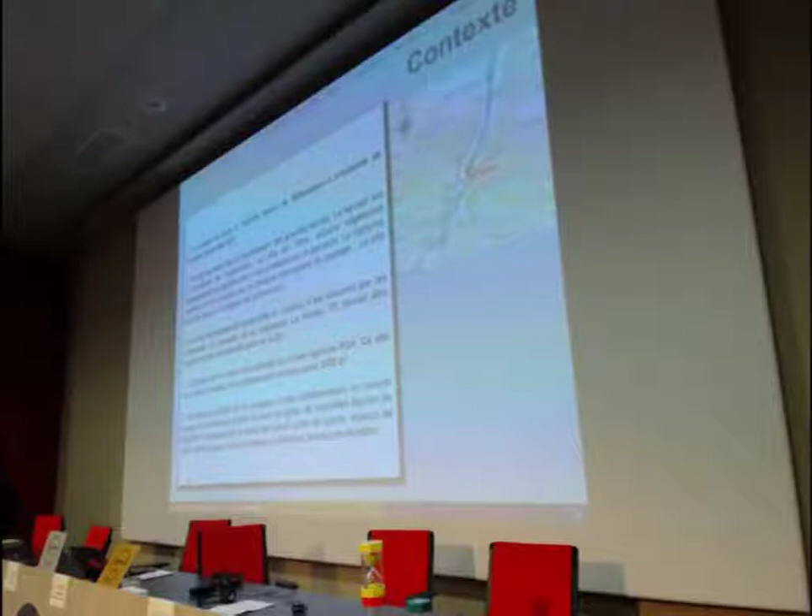As Mr. Muller was saying, there's a desire to work differently. We want to provide a pleasant working environment for staff with areas and facilities that are not just offices, but a sports area, a gym for instance, relaxing areas, with links between the indoor and outdoor rooms as well.

I wanted to show you the site location. You can see here, this is the sector, this is the site for the project. Here you've got the Durance River and the motorway exit for Manosque. This is the business area that I was telling you about.

And here is the actual site of the project.

The sustainable development challenges for the project came from the team, but also from the owner's specifications. The owner wanted virtuous architecture with a bioclimatic approach. We wanted to optimize thermal performance and sunlight, but also ensure comfort. There was an important link between indoors and outdoors, and we have a high-performance envelope for the building with a limited carbon footprint.

There is geocooling enabled by the close groundwater nearby for watering, etc., and also modularity and diversity of space that was really important. As we were saying, there has also been a lot of consideration of mobility from the project owner. I'm going to hand over to Bernard and Christian to present the project from its start and then talk about some access issues as well.

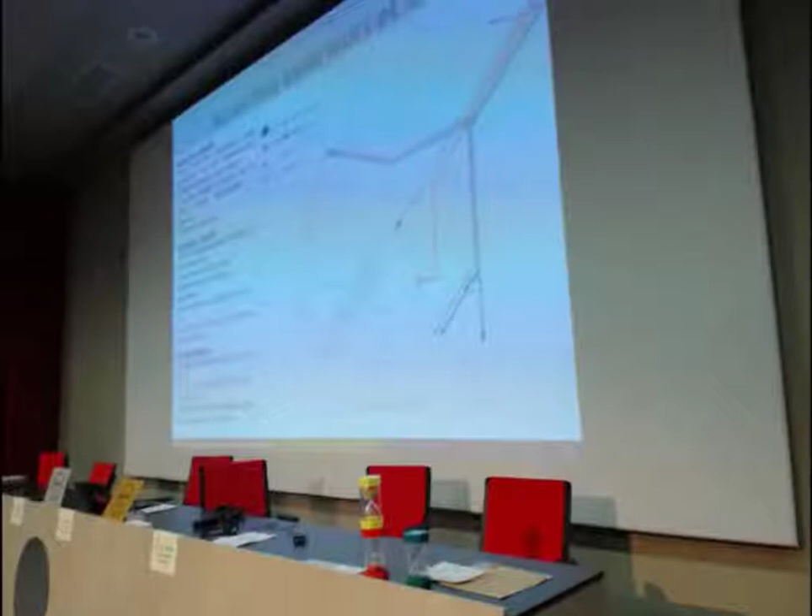So we are right at the south of that zone. As you can see, there's the motorway, there's the Durance River, and then a lot of empty space, which serves as a reservoir. We've got our site itself, access within this business area from the north. The idea of the project was to design with the northern entry and the south with this almost ditch.

We wanted to have a diagonal access for our project that creates a real square for architectural reasons, if you like. So this diagonal is continued throughout the building to arrive at the terrace and garden area.

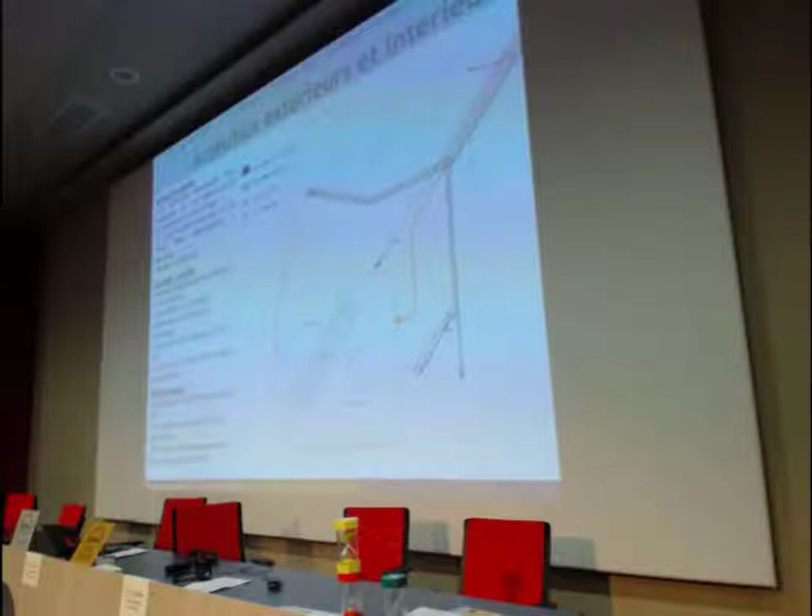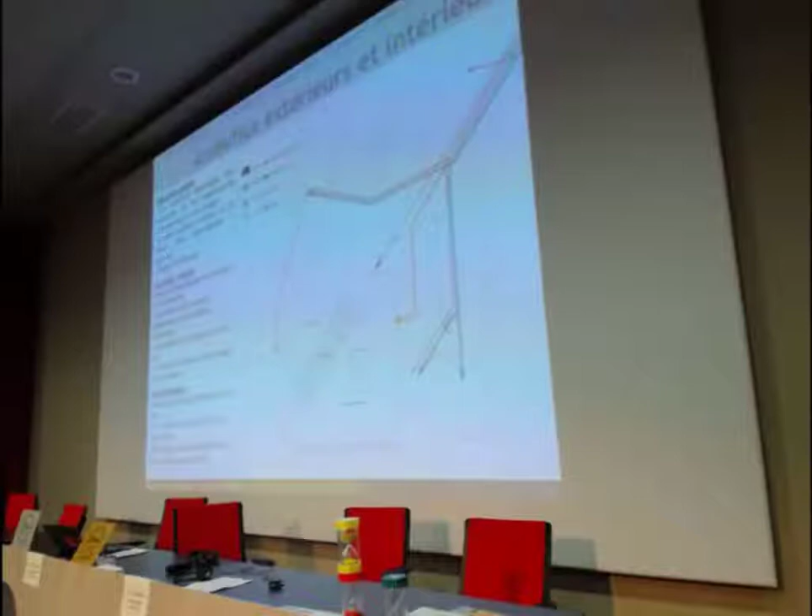Why did we do that? There's relatively significant parking requirements at the moment, and we did not want the office space to face the car parks. The employees arrive and they can park their car at the top. The idea of the project was to have parking on one side with tree coverage and then working spaces that are not directly opposite the car parking space.

One of the project aspects was to try and limit the number of parking spaces, so we were actually able to build some of them under the building to reduce that. There was a lot of work on access to have vehicle access, but also entrances for maintenance and technical facilities. There is a bike park underneath the building in this underground car park that is very highly ventilated.

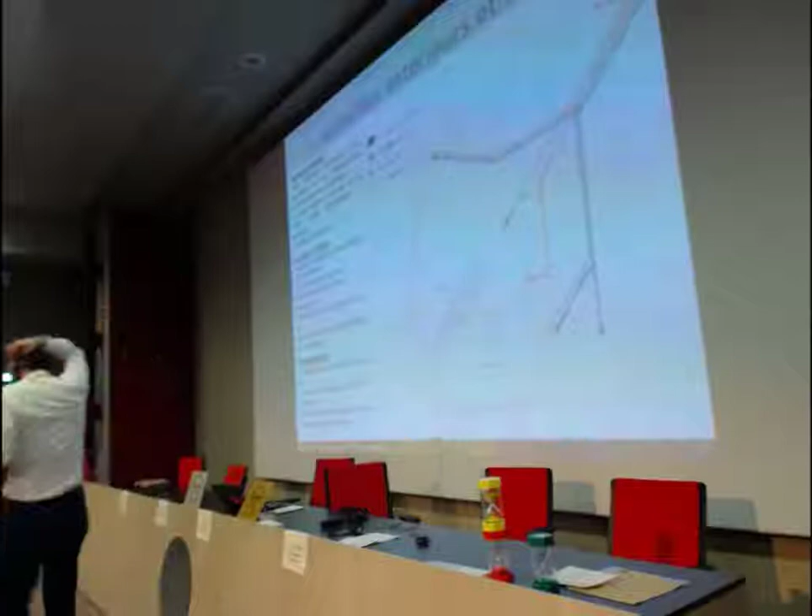So on the floor plan, you can see the concentrated nature of the car parking space with a lot of vegetation and plant coverage there.

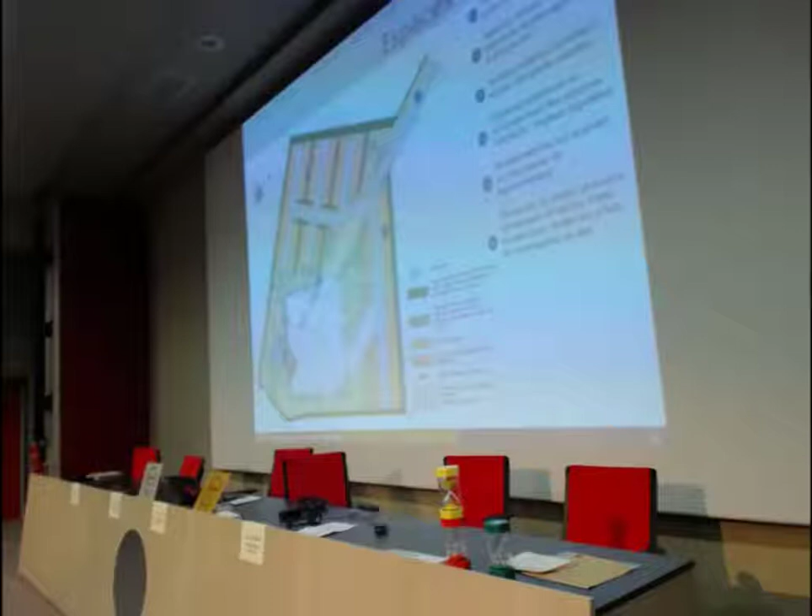As Bernard was saying earlier, we have this main axis that goes through the building over to the outdoor spaces that are very highly landscaped, with a small pond and a lot of plants. You'll see the theme of water throughout the entire building. We wanted to create a reflective water effect, almost like a mirror, which helps to bring water inside the building itself. You can see water in the axis crossing the building.

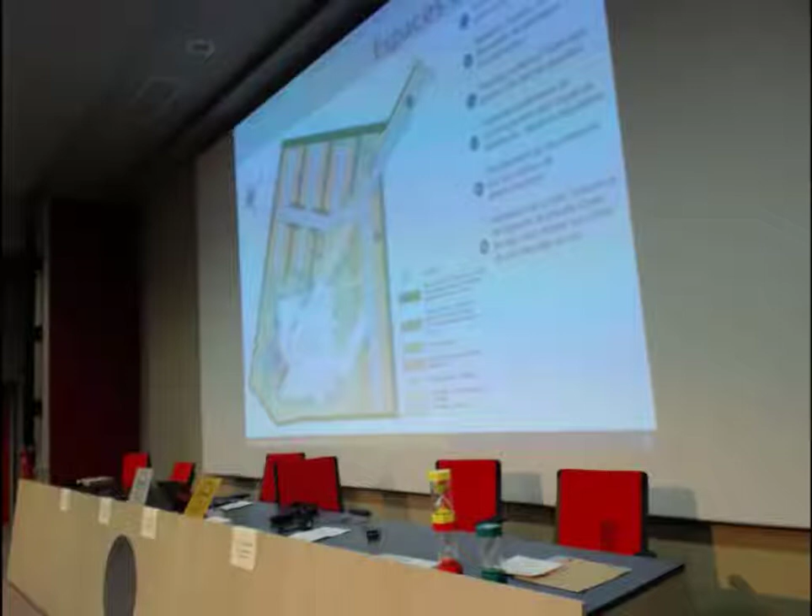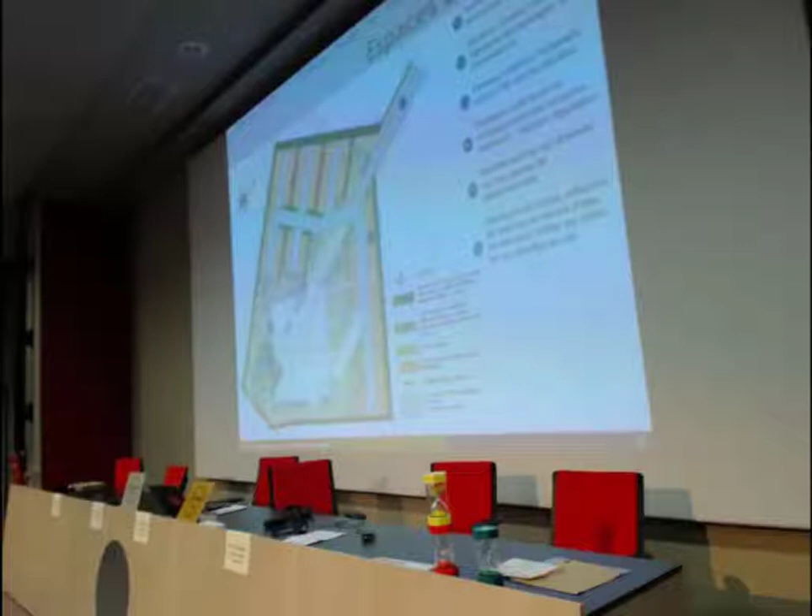It also brings coolness outdoors and indoors. In the contractors team, we've also worked with someone who's specialized in fountains and water. We've got water drilling through boreholes for the geo-cooling. So for the technical heating and cooling of the building as well, we're going to be drawing on this groundwater nearby.

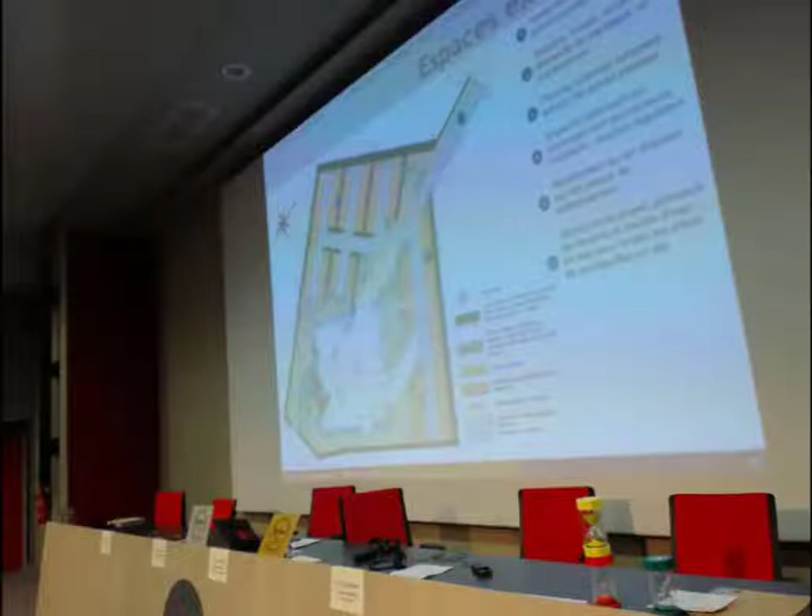The project owner had some concerns with water, mosquitoes, etc., so we wanted to work with a specialist in this area. From a bioclimatic perspective, we're more than 100 meters from the motorway, so we do not have the loud motorway noise from the building position. We verified that with our sound specialist.

In the two major wings, the building is split by this central road, and we've created two wings of work. We've got a small wing on the left and then a larger wing towards the south and the east. We have maximum sunlight input and light that is brought into the inside, and we're protected from the wind. We've been working with major bioclimatic data for the development.

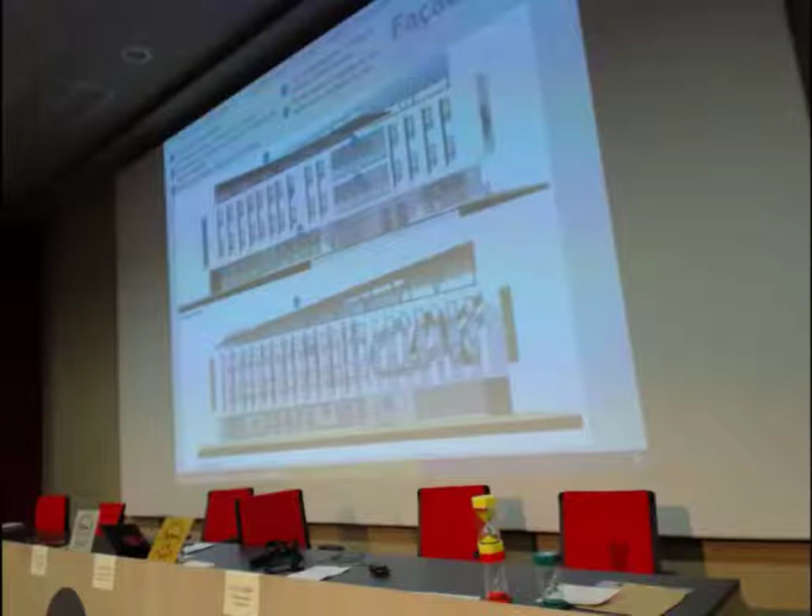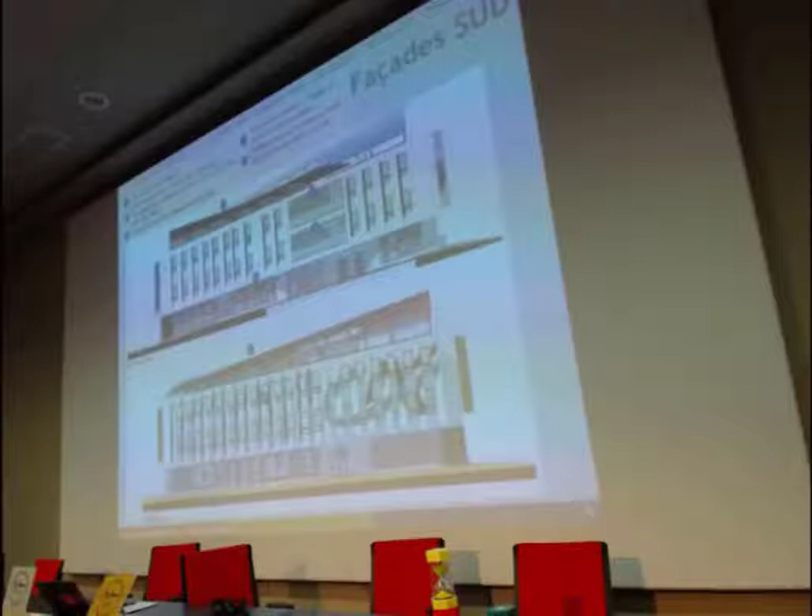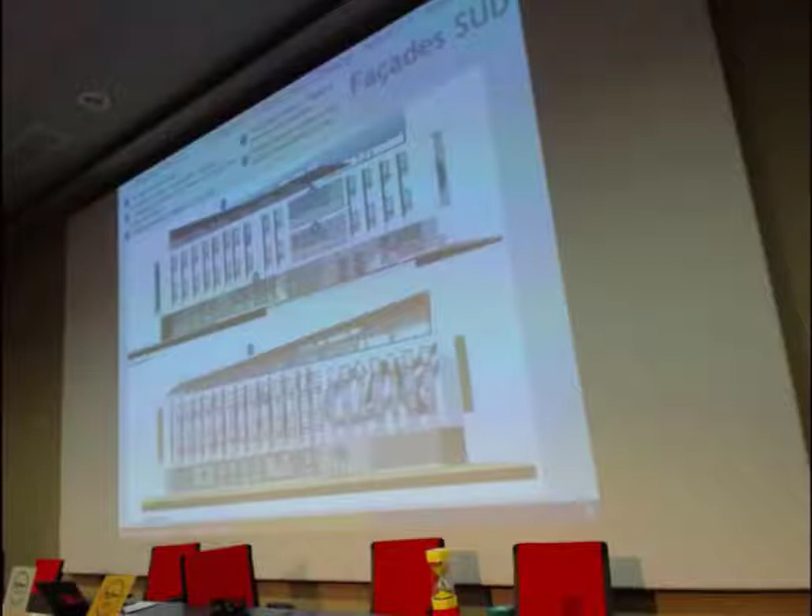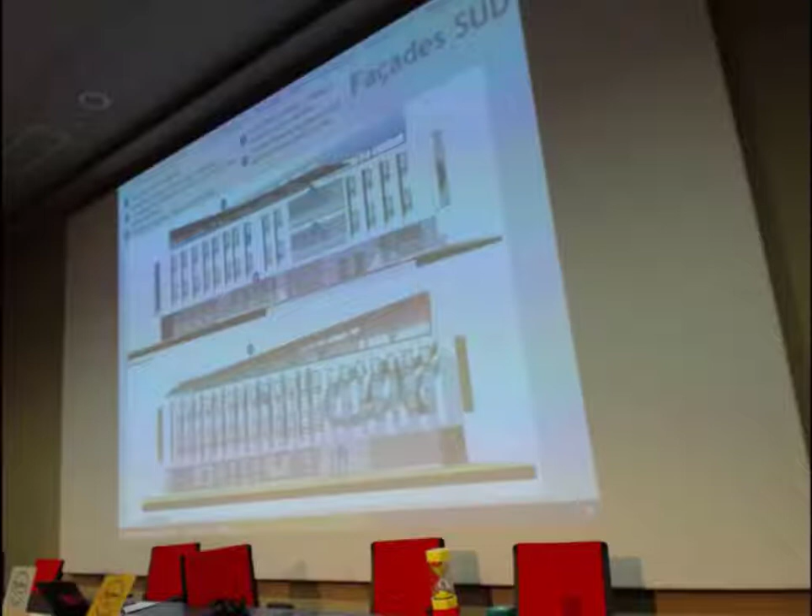So for any south-facing spaces, we have these solar protections in place. We've got variable solar protection in these spaces in order to ensure thermal comfort. Another point is that we're in a very industrial business zone with several thousands of square meters just nearby.

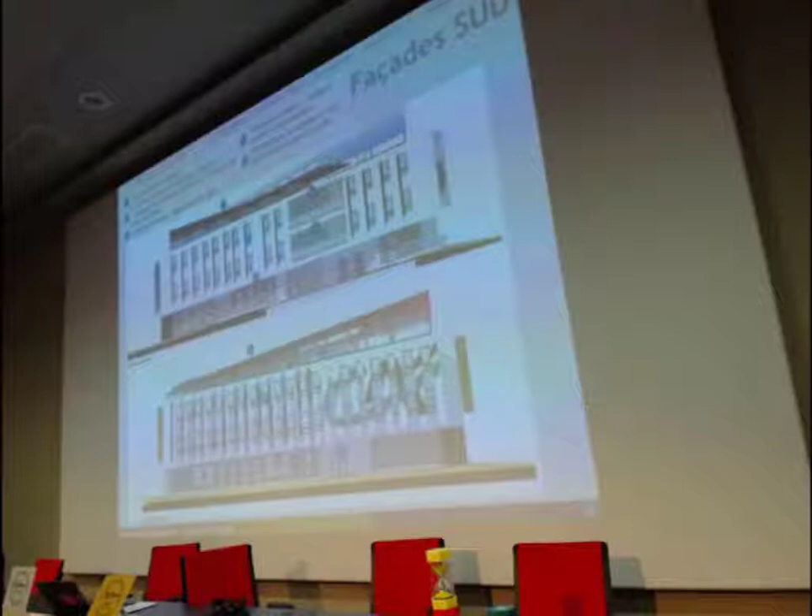This is an office building. We wanted to stand out, to be different from the type of industrial building. We have a slightly inward 2-meter space on the ground floor, which helps differentiate the building from industrial buildings that are very rooted in the ground.

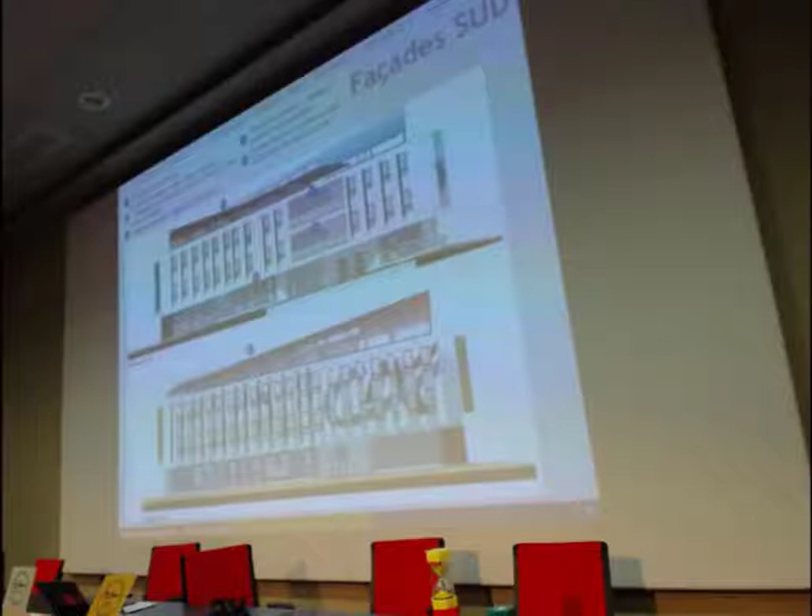The project owner also wanted to be level 3 in their project, so we have roof solar panels and try to cover all uses of the project, regulatory uses and office uses as well.

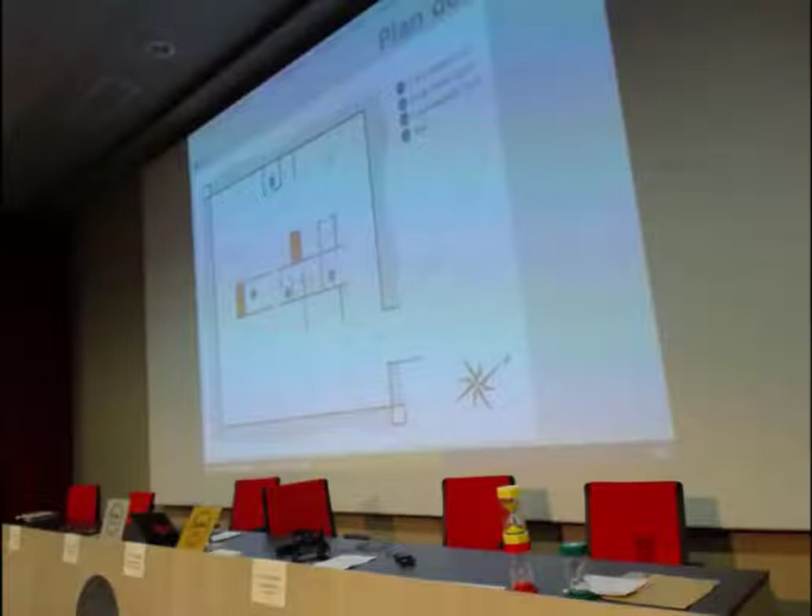Here's the floor plan. You can see that there is a vestibule in the north entry. There are external outdoor spaces that extend outwards from most facades.

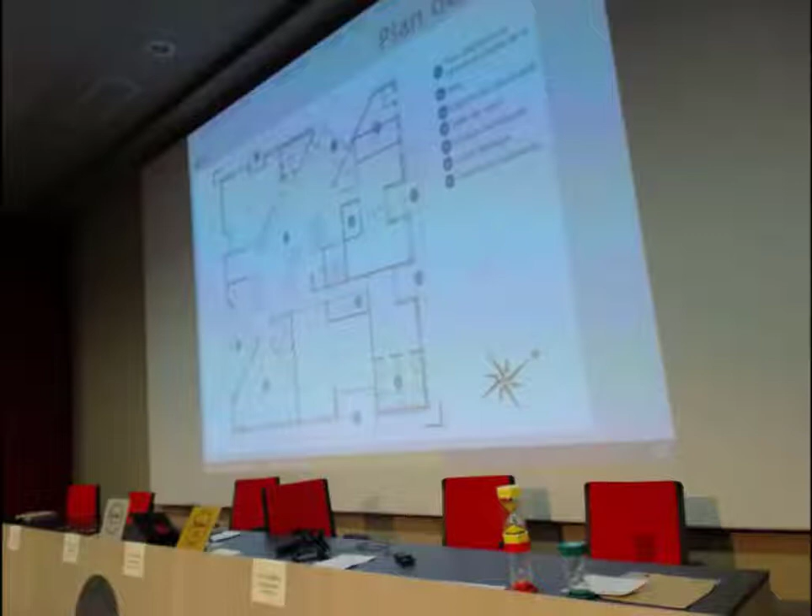There are some unusual spaces as well, like the gymnasium. We have the relaxation area, open space areas in the wings, and also meeting rooms. We also have a whole technical center here with technical rooms and the maintenance area for Crédit Agricole.

Upstairs, you can see open space. As Christian was saying earlier, there's a relaxation room as well, with access to the outdoors, and then this large space, a large corridor that you can access all of the other office spaces from. There are technical rooms and meeting rooms on every single floor.

So on the second floor, there is a similar system, and we have additional sunlight systems in place in order to achieve more harmonious lighting across the huge open space.

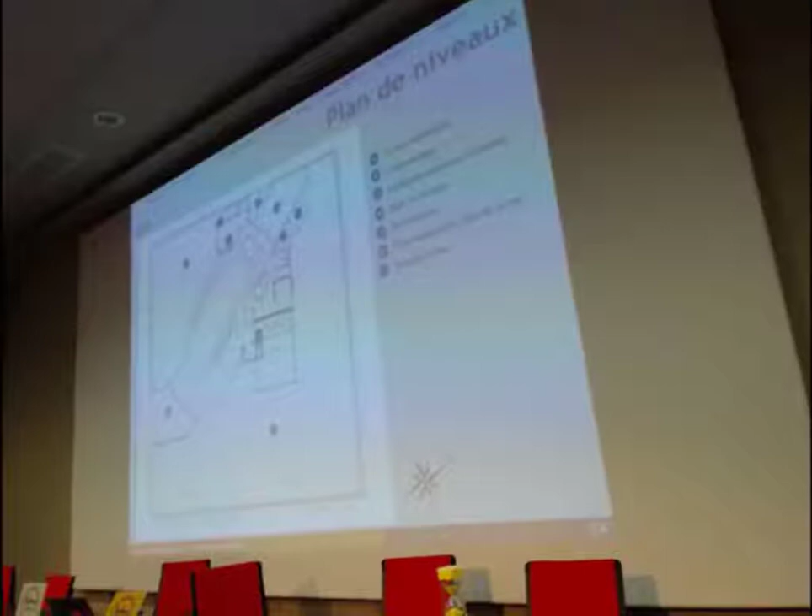One of the specifications from the project owner was the creation of a floor that could be rented out and shared as office space with Crédit Agricole. And with new ways of working, we will show you the type of space that the project owner wanted.

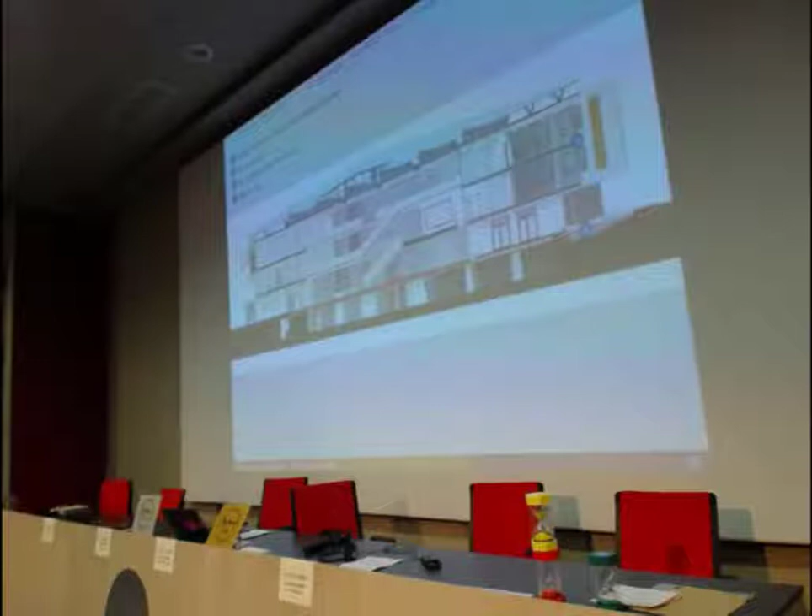In this cutaway view now, you can see the wood area, the concrete area, and the photovoltaic solar panels. We have these photovoltaic panels that cover these spaces in winter.

For operational costs, we have 6.2 million, and we have 920,000 in contractor fees. We have an administrative building. We have B1 for noise, BR1. We have a fully air-conditioned room. We can see a 39% gain for Bbio and a 41% gain for energy consumption, primary energy consumption.

In terms of regulatory regulations, we have 186,000 kilowatt production from solar panels, which are able to cover all regulatory and non-regulatory uses. On the basis of our estimations...

To look at the social and economic side of BDM, we had increased work for access for people with reduced mobility, with work on the underground car park, the accessibility of outdoor spaces. We have the sound loop in space for those who are hard of hearing. We thought about staff with disability and adapted the project to them.

And for professional insertion, the Green Space company working on the project ensures that disabled people are working within that.

As you can see, we're running out of time, but I will try to be clear. We have pooled areas on the ground floor, shared spaces. You can see the type of project that we were looking for, the type of space. We have meeting rooms, but also working areas that are a little bit freer.

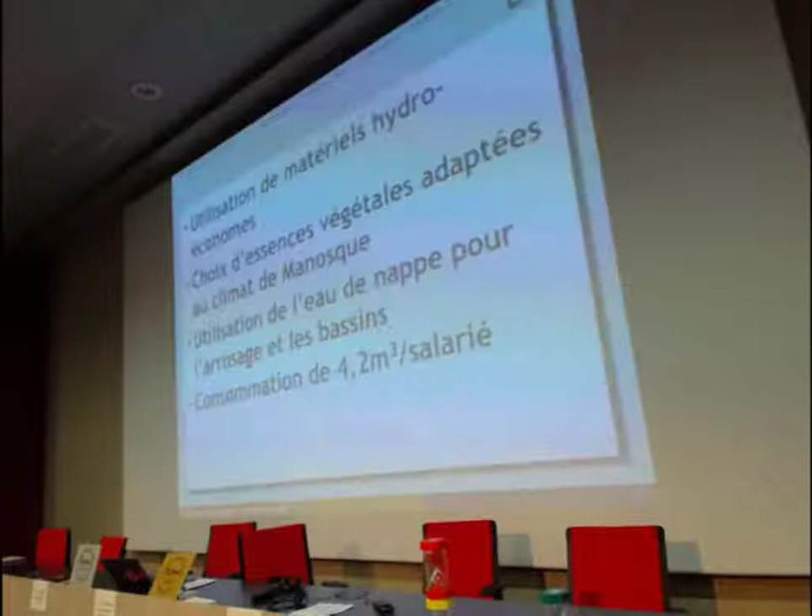We chose water-saving materials and plant species that are adapted to the area. We've got around 4.2 cubic meters per employee for water consumption.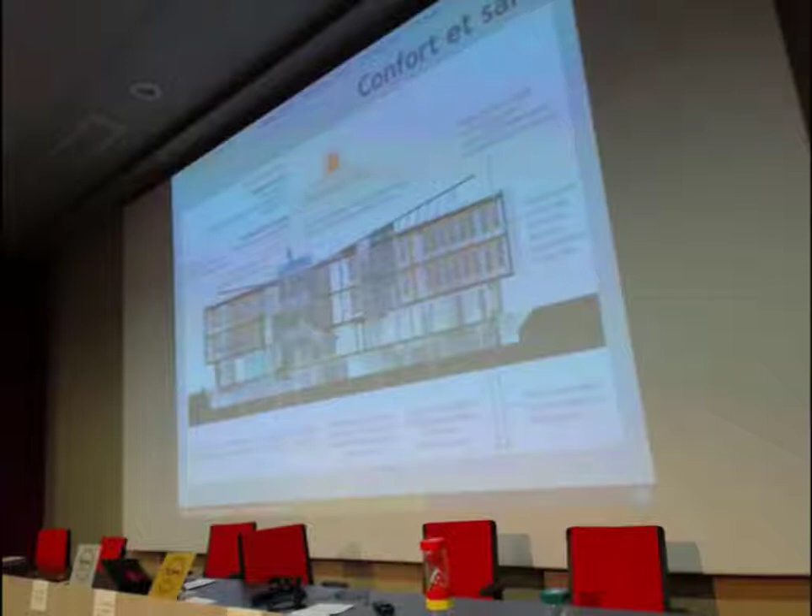We had a summer comfort simulation. The aspects that we needed to succeed were the use of solar protection, obviously, and the implementation of geocooling in dual flow in order to passively cool all of the spaces and create a comfortable space.

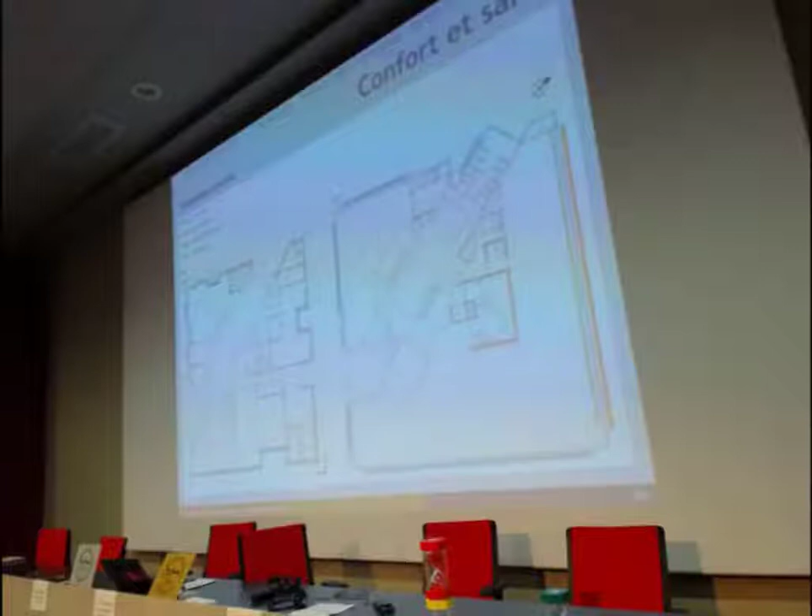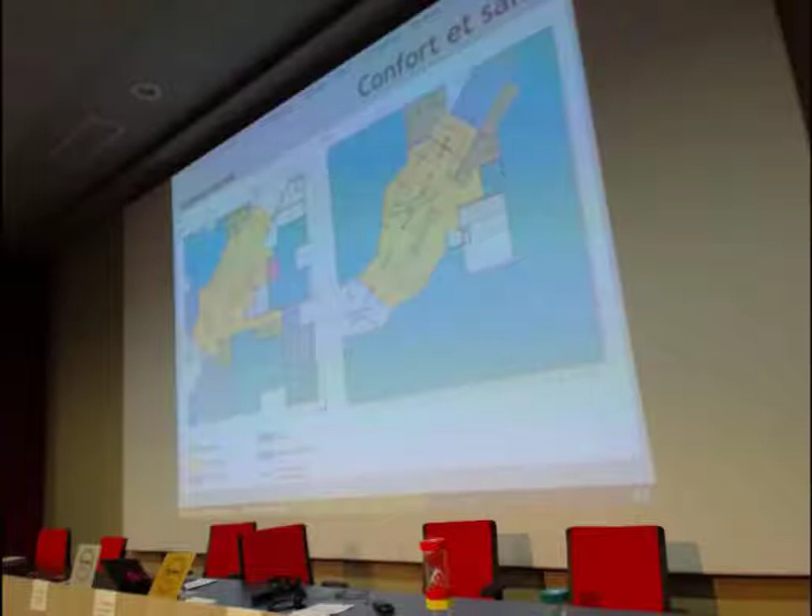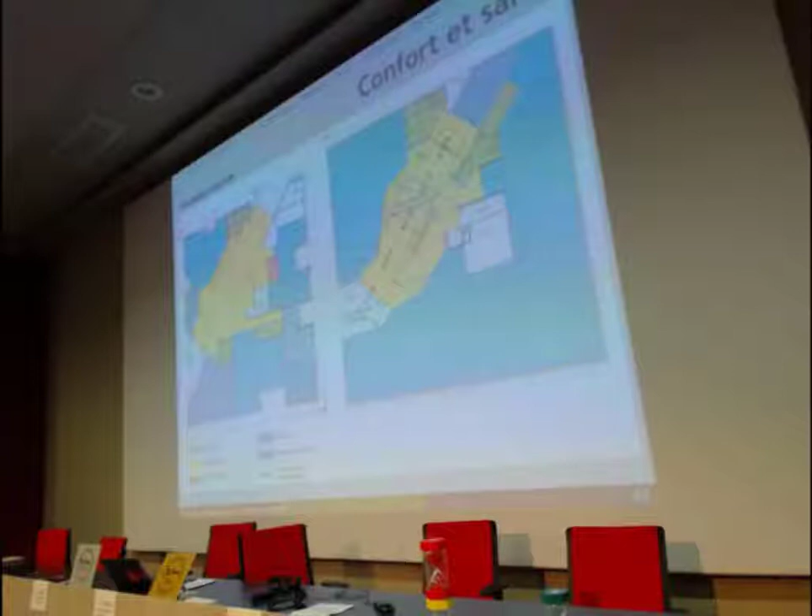Here you have the distribution of solar protections by orientation. On the ground floor, you have natural ventilation with a phenomenon of airflow and openings upstairs as well from the sheds, with triangular systems in place there.

We have a number of scenarios. We have got below 90 hours with geocooling, blinds, and the natural ventilation of the indoor road. We are going to avoid overheating at night by opening up in order to ensure natural cooling.

For the road, we used information to see the temperatures that we obtained for the indoor roads. We have a cooling and heating system along this road in order to provide greater comfort on the absolute warmest days.

With regard to our choice for health comfort, for carpets for instance, we have C1 and quite traditional systems that we often work with.